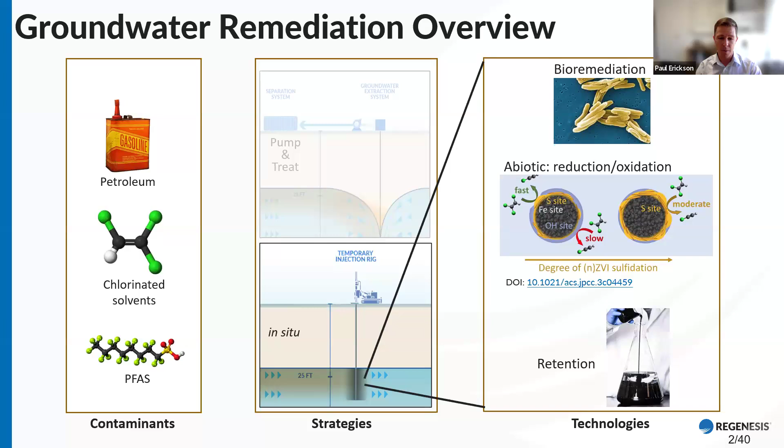But what we focus on at Regenesis are these in situ methods, where we're going to inject some amendment in the ground that's going to then passively help remediate or manage the contaminant that we're dealing with. So some of the different strategies and technologies that we offer at Regenesis and others can be something like bioremediation, where we are using bacteria to break down contaminants. Abiotic, so that could be chemical oxidation or reduction, as the picture I show here, where you can use zero-valent iron to treat chlorinated solvents.

But what I'll talk about today are these retention-based technologies. So using adsorbents, colloidal activated carbon, you can see a picture of it here, where we can inject these materials that are sorbents and use them, in the case that I'll talk about, to manage PFAS impacts in groundwater.

So again, I mentioned that I'd set up the stage on where a company like Regenesis fits in the world of remediation. And so this is what you've got, the different groups that are at play here. So site owners are those that have contaminated land or an issue that they're dealing with. Usually they're talking to a consultant directly. This isn't a perfect map. Obviously, there's crossover on a lot of these fronts, but it gives you an idea of how Regenesis, a tech development company, sits in the world.

And so everyone's got different questions that they're trying to address and problems that they're trying to solve here. As a site owner, what do I have to do? What's required of me, whether that's by regulation, what have you. But they're working with a consultant that's helping them figure out, based on what you have to do, what's feasible, what's going to be cost effective.

They're kind of helping put together the different technologies that they come to companies like Regenesis, which we've got our own set of issues and challenges that we're trying to overcome. Once we have a technology, how are we going to manufacture this? How are you going to get it to scale? We need to write tech standard operating procedures when you have these technologies and be the experts on getting them into the ground. And that's really where the partnership with academics comes in.

And so I show this picture for a couple of reasons. One, to highlight when you've developed something, especially an in situ technology, it's kind of understood that it's got flexibility. I can pick this up and hopefully bring it anywhere. And that's what I'm trying to highlight here. But on a personal note, you end up going to lots of different locations, and that's one of the things about the job that I really like.

This picture here on the left is an installation locally of a passive flux technology that we've onboarded because, and I'll touch on this in the talk, it's a really valuable way to collect groundwater mass flux data. We were trialing this in a local office here in California, which is where I'm based out of now. This is a picture of an early beta project that I worked on in my home state, which is Florida, actually North Florida. And then this is a project site where we're working in someone's basically front yard in Switzerland, which we also do work in, and as Cara pointed out, where I did a lot of my graduate work.

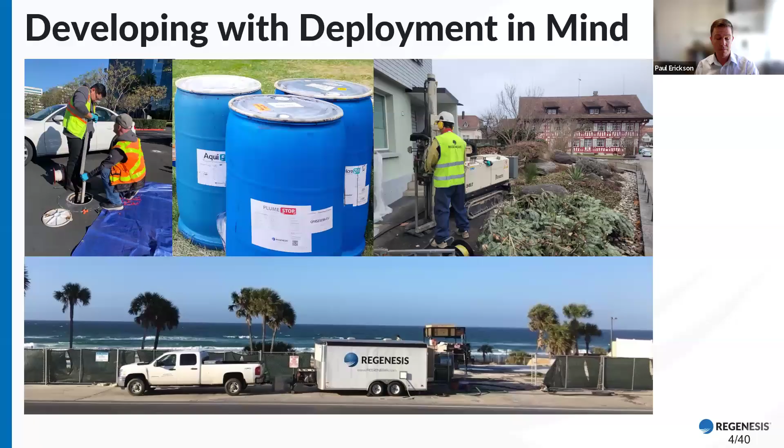So the idea is that these technologies can wind up anywhere. You've got to be able to pick them up and take them just about anywhere. And again, academics are how we answer those detailed questions to let someone like a tech development company figure out the specifics on how we're going to move this around and get it applied.

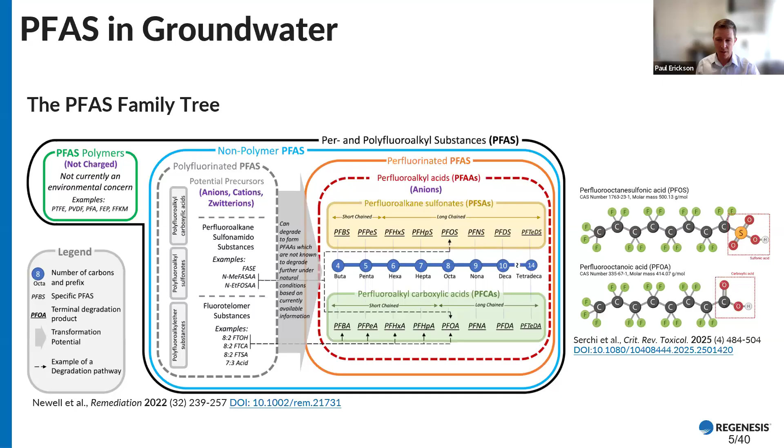Industrial point sources, so industry produced and used a lot of PFAS. And then there's the more relevant to our day-to-day lives, septic release. PFAS are present in all sorts of consumer products, resulting as well in wastewater treatment effluent releases to surface water. Another big one that many of you are likely familiar with that I won't talk about today is land application of biosolids from wastewater treatment plants, which have certainly contributed to groundwater impacts, but less so the case study that I'll focus on.

You've got all these different releases of PFAS, whether to the air or soil, but eventually they make it to the groundwater, and you wind up with these long plumes with no real degradation in the environment, at least for perfluorinated PFAS compounds. So we can't lean on technologies that a company like Regenesis already uses, like bioremediation. No proven application of bioremediation for PFAS. Very little good data right now on in situ means of destruction for PFAS. So we're left with few options to reach these low targets for these extensive groundwater plumes.

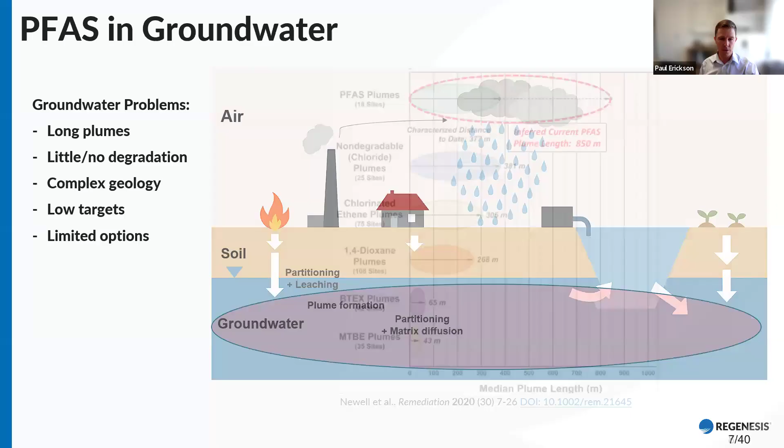To give you a picture of how PFAS stacks up with contaminants we've dealt with in the past: because you get basically no degradation in the environment for perfluorinated PFAS, your plumes can be very long. Starting down here with gas station related hydrocarbon contaminants, BTEX and MTBE, there are plentiful microbes in the environment that can degrade them even under anaerobic conditions, when there's no oxygen. That tends to keep the size of these plumes in check.

Then as you go up to something like chloride, which is essentially a tracer, there's also no degradation, so they start to look like these PFAS plumes. They get very long, very difficult to manage, and you have very few options. So we unfortunately find ourselves in a situation where you potentially have to prioritize risk reduction over removal. There are now tens of thousands of sites in the U.S.

Alone that have PFAS impacts in the groundwater. So we're going to need different strategies, different ways of thinking to deal with these contaminants once they've been released.

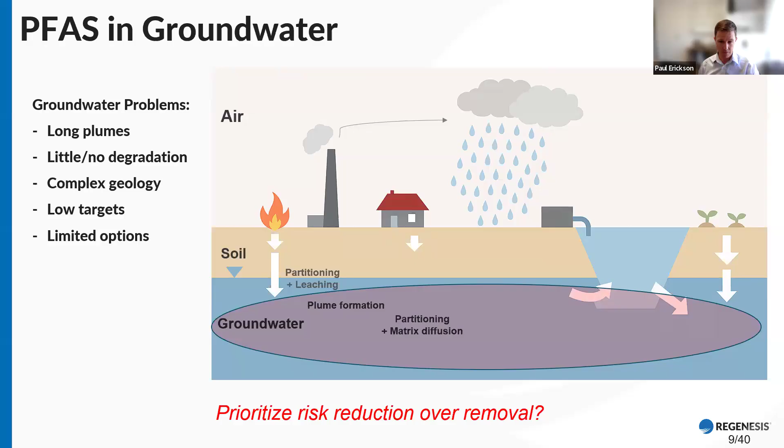So one idea, and really it forms the rationale behind the treatment that I'll talk about using colloidal carbon and injecting it into aquifers to increase the retention of PFAS within these areas, is based on this concept of monitored natural attenuation.

And so it's not a do-nothing strategy, but a focused risk reduction strategy. The idea is that if you've got PFAS impacts in your groundwater that are migrating somewhere, you're trying to prioritize and take note of where they're going and what they might be affecting, and then do something to try to alleviate when this mass shows up as a function of time.

So we can add sorbents, or just understand what the impacts will be to receptors. I'll show some slides here in a second to get into what that means.

If you can take what would be without any retention—whether that's natural retention, matrix diffusion, or these sorbents that we put in—and add something to the situation, you can lower the discharge with time. Then you're able to bring down what shows up in terms of mass as a function of time into a more manageable, acceptable area.

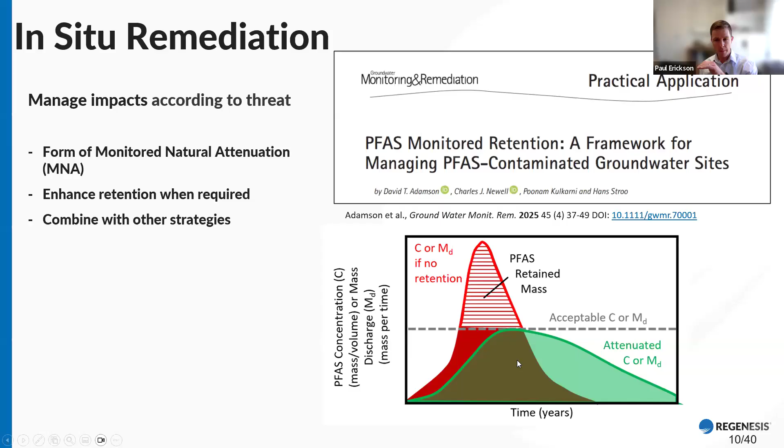The idea that Adamson here, and the folks at GSI, have painted is this landscape that kind of looks like a baseball diamond. If you've got PFAS plumes that are migrating, there's some mass discharge with time, and on the y-axis you've got how close you are to a sensitive receptor.

So drinking water wells or water bodies. What you're trying to do is understand where—higher being much higher discharge, and a shorter travel time being a problem because you're going to have an effect sooner.

You can prioritize where these areas are. And if there's low total mass and a long distance until you'd impact the sensitive receptor, you may be okay to just monitor the contaminants and mitigate the impacts that way.

And then when there's a situation where you've got more discharge or a closer receptor, you can put sorbents in, you can do something. Sorbents is just one of the measures that they talk about, and the one that I'll talk about.

But there are things you can do to try to push your site into this category where you can manage it in situ, and save the higher intensity, more expensive treatment strategies for the situations that really require them.

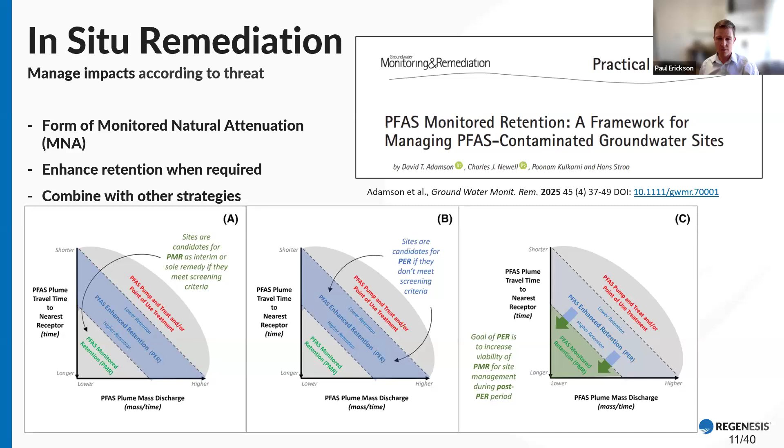Because with pump and treat, you will have situations where you still absolutely need to take the mass out of the situation or contain it by more intensive means. So that's sort of the concept, the landscape behind using strategies like this.

And so now I'll get into the case study here, a study that was done by Paul Hatzinger and his colleagues at Aptim, along with Tony Danko with NAVFAC. And I present this case study.

This is a technology that we've now used on a number of sites worldwide. But this is a good case study that walks through the different steps to understand the technology, how you get it into the ground, and the effectiveness of it within a limited time period.

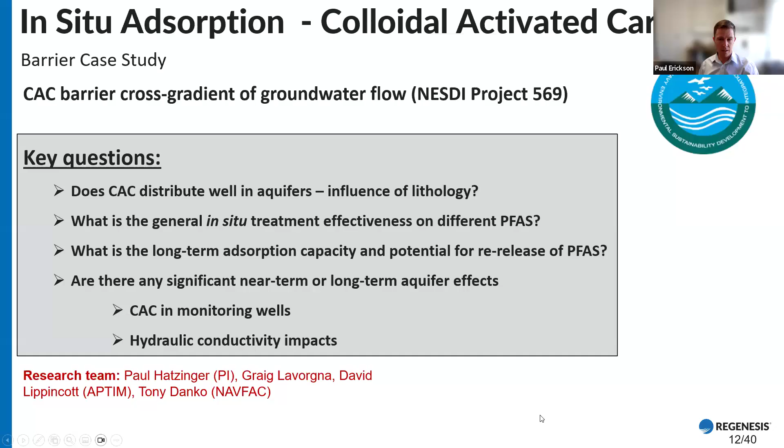And then looking at some of the other impacts to an aquifer that you need to consider when you're injecting a solid—which colloidal carbon is still a solid. You've got to keep tabs on other factors, like hydraulic conductivity changes that may happen. And so these were the questions the study was trying to address.

And so this is what it looks like. You've got your PFAS plume, and groundwater is pulling it into this area that we're going to treat with this colloidal activated carbon. Then, if everything is working right, you should get good distribution of your contaminants, and removal by adsorption and sequestration within this zone where we've performed our treatment.

And so the tasks of this study were, first, assess the site that the treatment's going to be done on. They did some column tests as an assessment in the field or in the laboratory of just the basics of the idea.

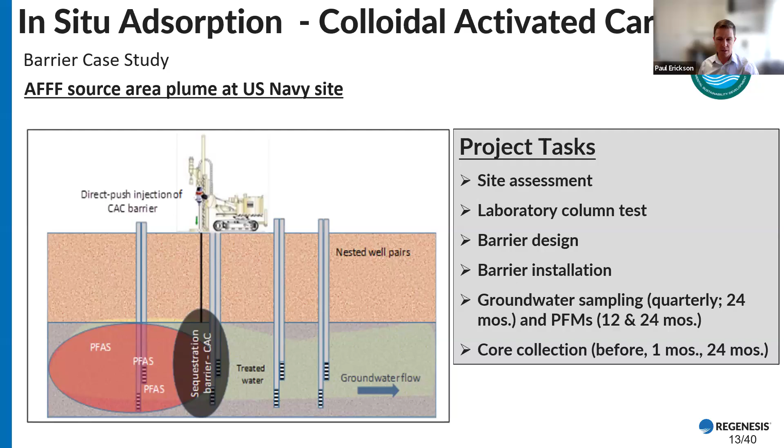And then really I'll get into the results from there. I'll show some pictures of the installation and then walk through the results of the study.

So this is what the site looked like. You can see here, a fairly sandy site. Depth to a confining layer, a clay layer, was about 25 feet.

I'll show some data from this A to A prime. The demo area, you can see here in this yellow circle, is pretty close to soil boring 1. And this was a fire training area.

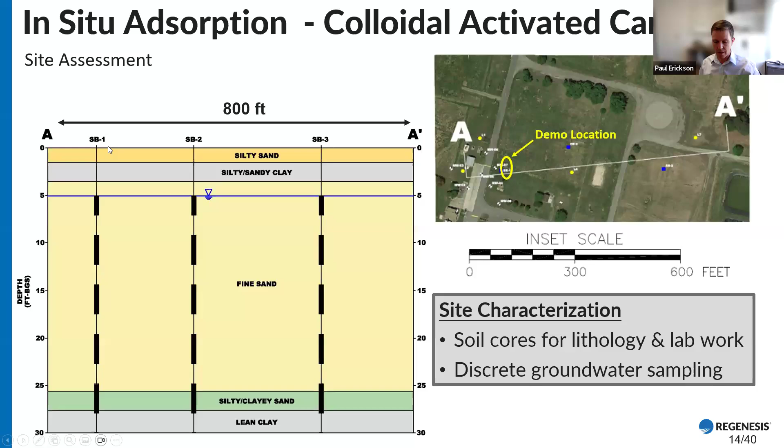And you'll see in these data, close over to where the demo area was, there was still quite a lot of PFAS in the upper borings, the groundwater in the upper areas. You can see it's dominated by these C8 PFAS, so PFOA and PFOS were really the most prevalent PFAS. You can see they're especially closer up towards the demo area and the source.

There were still some of the precursors and other smaller chain PFAS, but as you get farther away, you can see that there's either by flushing or by diving the contamination really in towards the bottom. But up in the area that we're working, there's a lot of mass still present up in the vadose. That'll come into importance when I show some of the results getting towards the end.

Just a quick look at the column study. Again, this was kind of a go, no-go step in the process, and this was all work done in Paul Hatzinger's lab at Aptim. It was trying to ramp up the flow rate of the groundwater.

So using site groundwater and site soil, they applied some of our PlumeStop colloidal activated carbon to the column, and then tried to simulate, in a series of just 4 months, 2.5 years of the study length of groundwater flow.

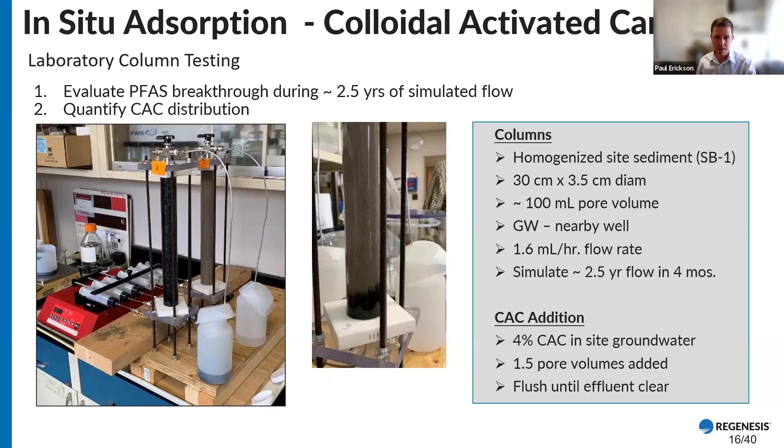So you can see here the evenness with which the carbon is coating. They're going to pull the cores apart and confirm that here in a minute, but you can see it flowing on, so it just flows into the sands. This is how you're able to build these hopefully continuous areas where you've put the sorbent that's able to remove the contaminant mass as your PFAS mass moves through.

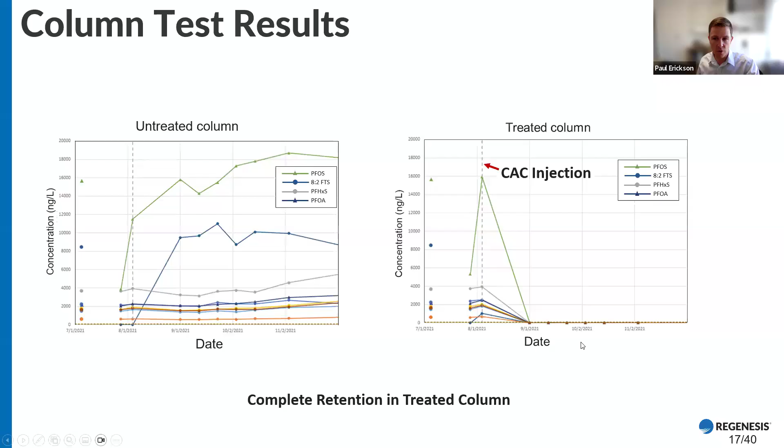I'm really just going to move through this pretty quickly, but as expected, in a short duration study like this, you see complete removal of the PFAS in the treated column, versus the untreated column where with very little lag, you see breakthrough. Again, that was because it was using site soil and site groundwater. But again, this is just a go, no-go look at the performance of this approach.

And then wanting to understand, okay, if we take this to the field, are we going to see distribution? Because we preferably like to have wide coverage of this sorbent so that you can remove the contaminants that are fluxing through and reach the sorbed mass that's already present within the treatment area as well.

So one way that they went about doing this is a combustion technique. They segmented the column, you can see here it was frozen and segmented, and then tried to get the carbon that was in the soil column this way. You can see fairly even distribution, and by this method, they were getting about 5 grams of carbon per kilogram soil, so a little bit higher than expected.

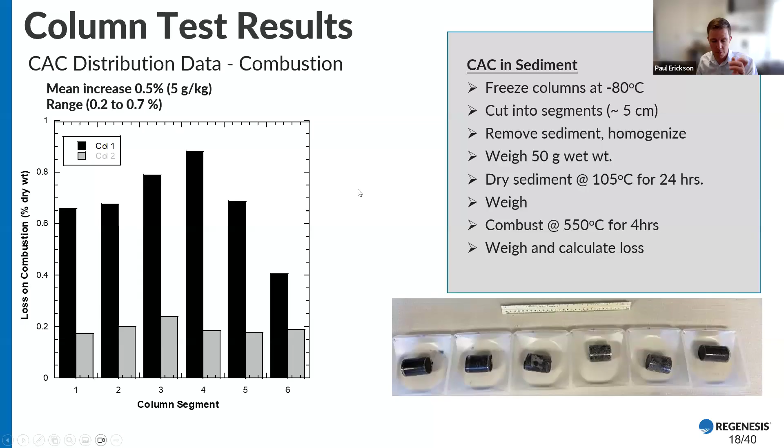And then they tried another method, developed in part by, or really entirely by, Ahn Pham and his group at University of Waterloo. It was a dye-based method they got the idea for, and we've spent some time back and forth with them on this, because it's something we can take to the field and use to help verify placement during an actual application. This is an example of an academic group helping us develop tools that are very practical and have very strong relevance once you get to the field.

This is the demonstration of this being done in Pham's lab, but they took those same soils and then ran the analysis again. You can see column 2 is the control, with no carbon put on. Column 1 was the treated column, and it got closer to what we expected and what you'll see the target dose was in the field, using this kind of method to figure out what the weight percentage is of our carbon on the soils.

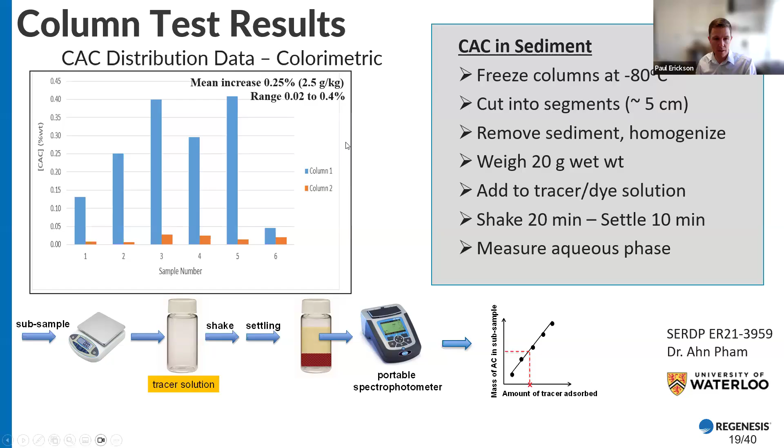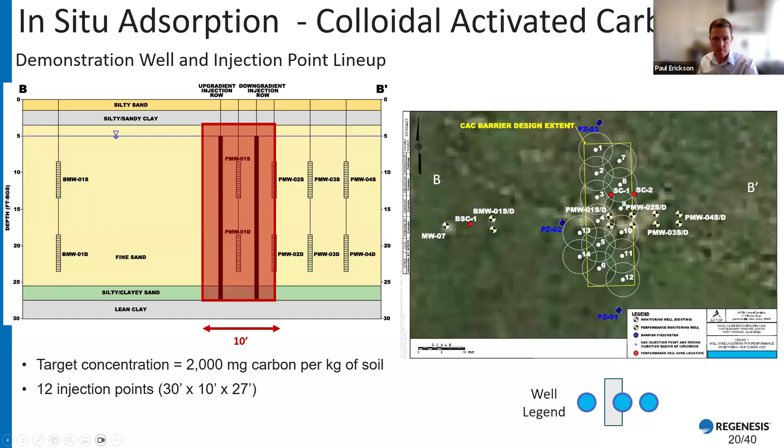And then this is the 10 feet down-gradient wells, again both shallow and deep for the data that we'll look at. Just to give you a picture of what it looks like to implement this in the field - on this particular site, the water from the hydrants on the site, this was in the Northeast, a naval air station, water had to be brought in and treated so that it didn't have PFAS in it.

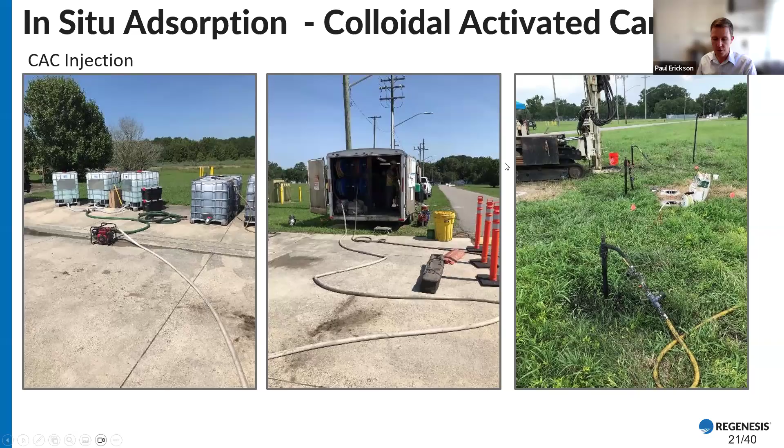That was the request for the study. You can see a picture of the trailer where the products are mixed and then injected into the field through these temporary push rods. So I've shown already a couple of pictures of these geoprobes - this is what we use instead of dedicated injection wells. You can put in these temporary points where you can inject the products after you mix them, and pull up the rods when you're ready to do different intervals. So there's a lot of flexibility on how you get the amendments in the ground and where you can work with tools like this if the geology will let you do it.

So getting into the performance monitoring - the field parameters that were measured, you can see here. But what I'll really focus on is the PFAS results, and then I'll show you some of the soil cores. Using those methods that were validated in the column study, they were able to go back out and, as part of this project, look and understand the distribution of the carbon within the soil, within the treatment area.

And then what I'll end with on the data is a measure of passive flux meters. This is a tool that, when you're talking about managing mass discharge and how much contaminants are leaving a site, it's important to think about mass flux - how much of the contaminant, not necessarily in concentration, but what's the actual mass coming off of a contaminated area, and are you managing that properly. These passive methods are really important for measuring that, as well as, I'll touch on it, the impacts to the permeability of our area - are we inhibiting groundwater flow with methods like this?

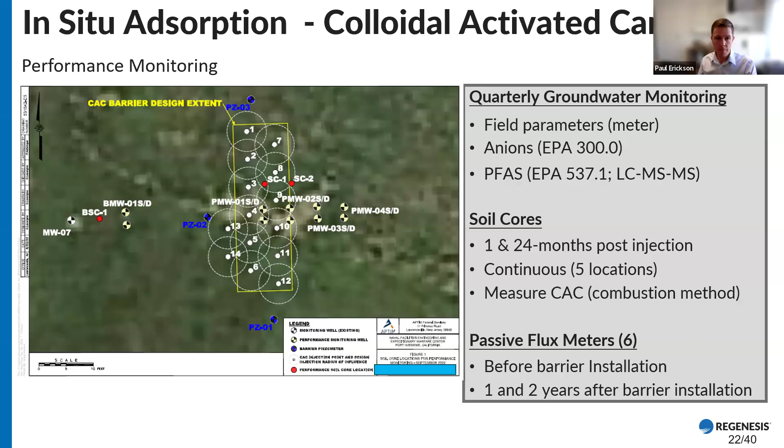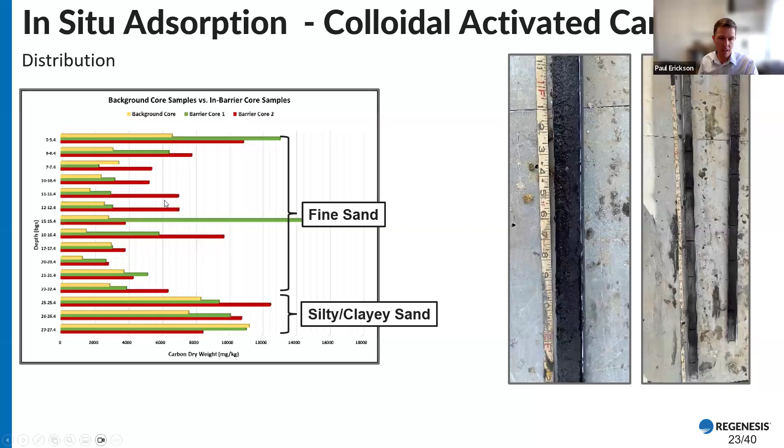If you look at the background cores, this was done by the combustion method, so they weren't ready to use the dye method on this particular project. What you see is that there is a background organic carbon that's picked up on, or just volatilization of what's in the soils with this method in background. In these sandier soils, the background's not so high, there's not so much organic carbon, but in the silty clay soils, you did have quite a high background. So we can subtract that out to get a measure of what the carbon concentration in the cores was compared to the background after application.

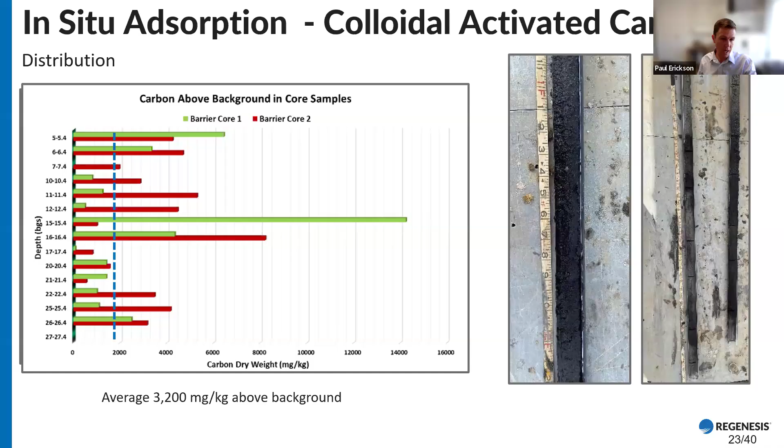What you can see is kind of what you expect. When we do these injections and put the carbon in the ground, what we're trying to achieve is a nice, even, uniform coating, but you do see heterogeneity in where the carbon goes. That's expected. Your aquifers are quite heterogeneous, and your material is going to follow the path of least resistance when you inject it. So generally what you see is distribution of these amendments, carbon or any amendment, within the areas that are more transmissive. But importantly, the dose we got, the average dose within these cores, remember we were targeting roughly 2,000 milligrams per kilogram. Within these cores, we're in that ballpark, on average. So we got the material where we needed it to be.

Now going into the data, this was 2 years of monitoring available for this project. What I'll do is step from up gradient to down gradient to give you an idea of what the performance has been like in this treatment.

What you see is that 20 feet up gradient, this red line, you've got the shallow concentration. This is total PFAS. And the blue one here is the deep. What you see is that you've got quite a lot of variability in the PFAS concentration. They vary by more than a factor of 2.

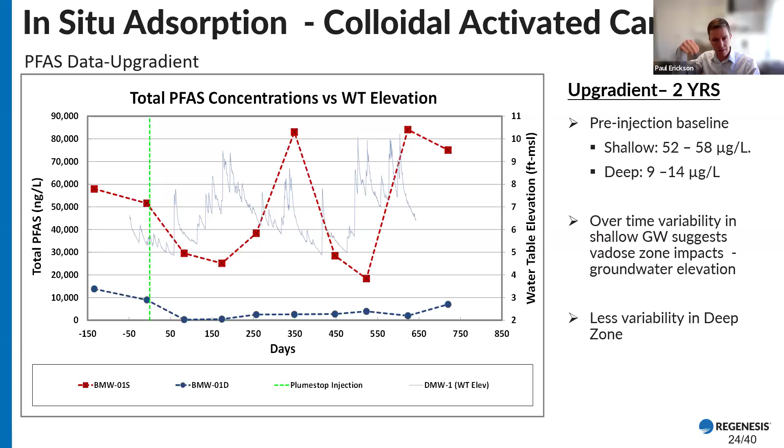Working up close to the source area, like we said, you've got ongoing infiltration potentially. And not to mention, you've got this air-water interface where you've got quite a lot of PFAS that tend to accumulate. If you have water table fluctuations, you can get mobilization of this mass down into the groundwater, and that's what you see here. So you've got the water table elevation, and what everyone kind of hypothesizes is that after you get these rainfall events where the water table comes up, you see these big fluctuations in your PFAS concentrations. That's much more attenuated in the deep, as you would expect. It's not as hydraulically connected with what you're seeing above.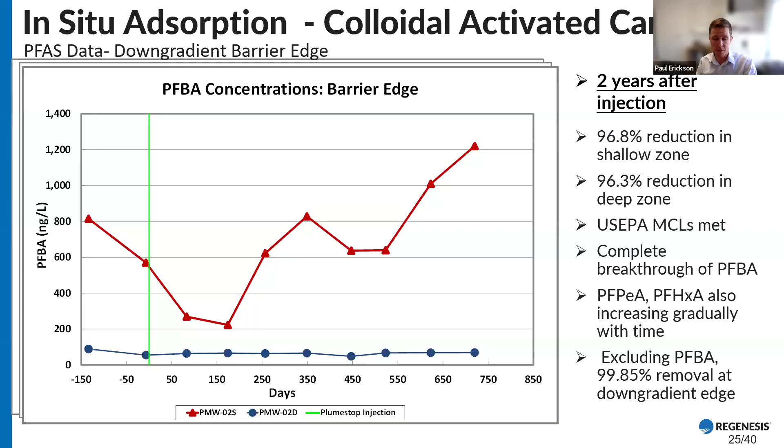But what you do see is breakthrough of your shorter chain species. This is one of the limitations of the technology. For the contaminants of most concern and highest regulation right now, you get good removal and good performance. But for lighter chain species, this approach is in the same situation as many others, that these compounds, PFBA and short chains, they're too hydrophilic. They don't adsorb well to activated carbon, and so we don't see performance with these species. They almost act, for something like PFBA, like a conservative tracer.

PFPeA showed a similar story performance-wise, but then we started seeing, most likely in the shallow area, infiltration from above or mass being picked up from fluctuation in the water table.

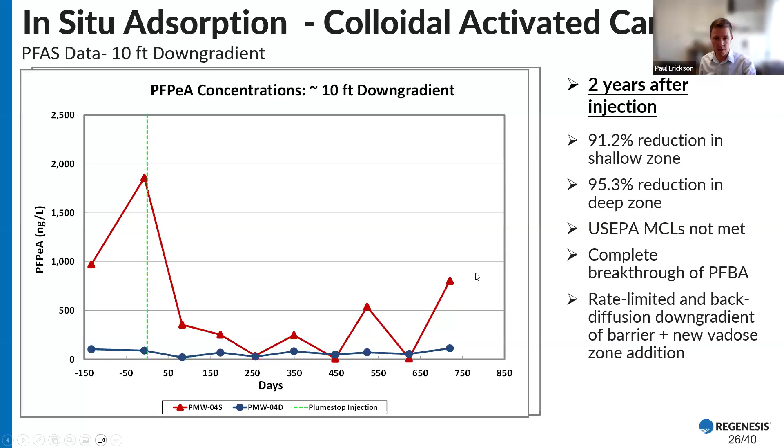Another measure beyond concentration, as I mentioned, is mass flux. They use these devices, and there are a few different offerings for this type of data collection, but the idea is that you put in resins that accumulate the mass moving through onto cartridges. We put them in each of our wells at a couple of different time points to figure out not just concentration, but the mass flux and also the groundwater velocity, and how that's varying before and after treatment.

Just as an example data plot, to give you an idea of the power of these data approaches: on the top here you've got Darcy velocity, and on the bottom, mass flux. This is just an example plot, but by depth you're able to delineate where your groundwater is moving.

In this plot, you see it's fairly homogeneous - you don't have much change in your groundwater flow. But on this particular site - again, not the one I'm presenting on, just a demo site - sometimes you get one particular zone that's very important for managing, for really knowing where your plume is evolving from and being transported from, and sometimes it can be this very narrow zone.

For these injectable methods, or any type of in situ work, understanding where your migration specifically is occurring is very important for doing it properly and getting the performance you're after.

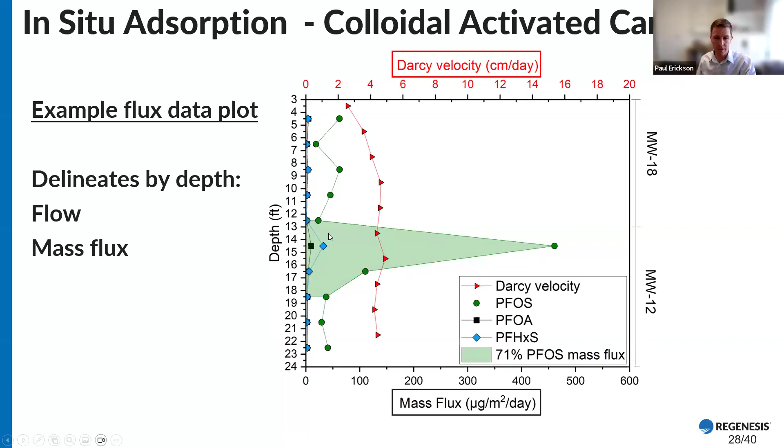Moving on to the data, you've got groundwater flow rates here, and you can see that from baseline to year 1 and 2 there was quite a bit of variability, and this is due to the water table fluctuating. As the groundwater table comes up, your groundwater velocity can go up or down as a function of that. Looking across the years and different wells, both the background within the barrier and down gradient, there was no evidence of aquifer clogging.

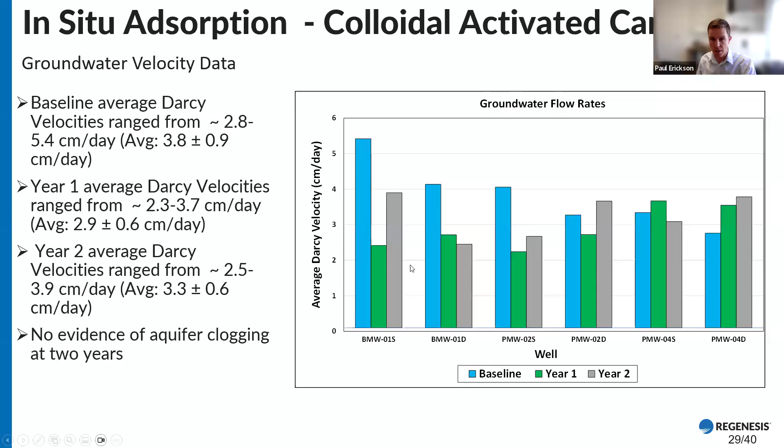So again, you do expect some modification to the permeability - you are putting in adsorbent - but the loadings that we target, we do with the intent to try not to change the permeability all that much.

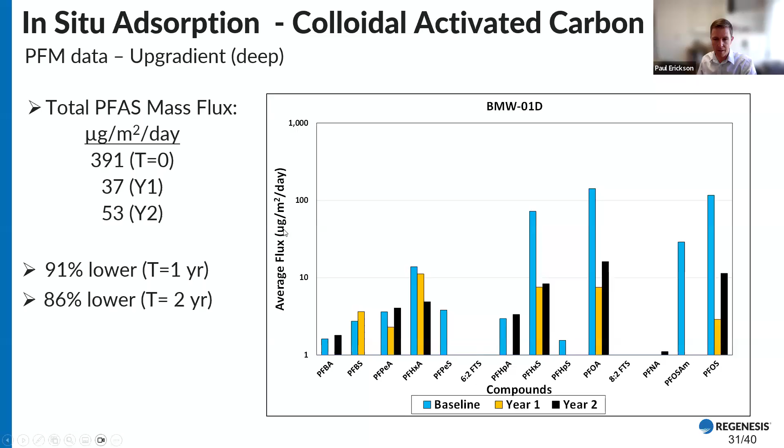Getting into the mass flux, up gradient of the barrier we again saw fluctuation from baseline to year 1 and 2. It's kind of all over the map, and again this is partly because of the fluctuating groundwater. That was the shallow, same thing in the deep. This is now a log plot on mass, so it's micrograms per meter squared per day - that's the up gradient data.

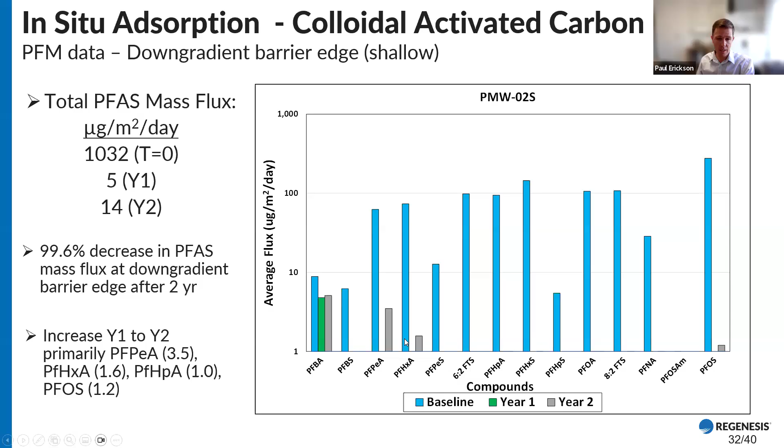Once we get into the barrier, similar to the concentrations, as you'd expect you see reductions - removal of your longer chain species is more or less complete. Again, for PFBA, here's that mass flux upticking after even a year, and then of course the second year as well. In the deep it's the same story: short chains are where you see a little bit of mass coming through, while the longer chains show good performance.

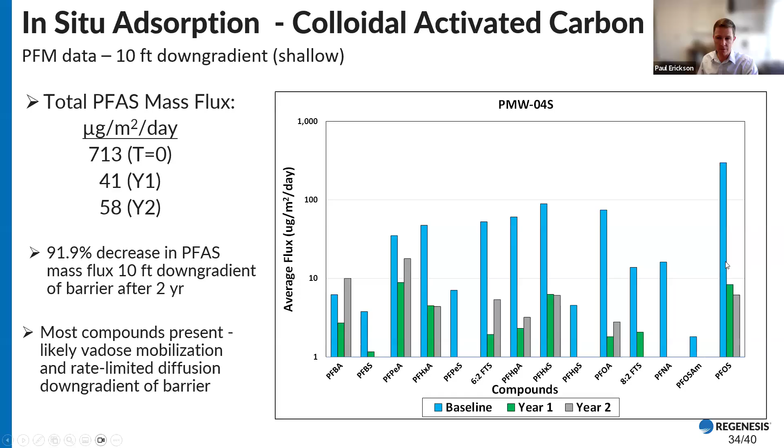At 10 feet down gradient, for at least PFOS, that same trend we saw - a decrease from year 1 and 2, especially over baseline - shows up in the mass flux data. Same story in the deep sections as well.

So wrapping up the case study, what we were seeing in the shallow was very likely due to the water table coming up and down - you get PFAS that end up getting mobilized, and you see that in the shallow data. That's something that has to be accounted for when designing and deploying these treatments: what's your performance metric, and what are your expectations for what you're able to achieve with methods like this.

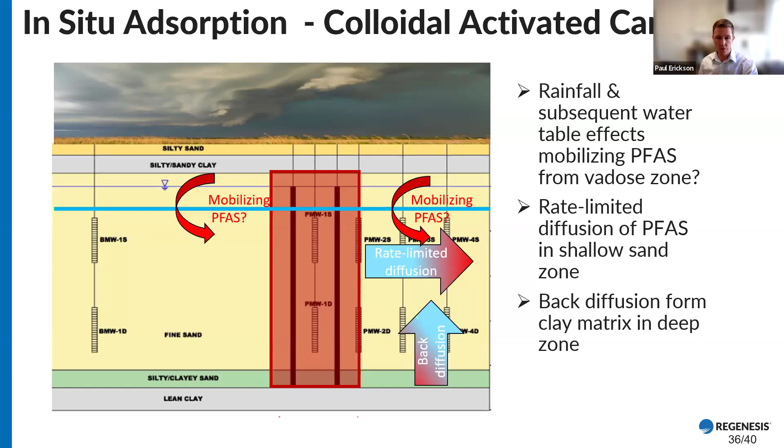In the deep, the mass that we likely saw in these down gradient wells, not so much in the barrier wells, was likely due to matrix back diffusion - contaminant mass that's been loaded up over the years in these silty areas coming back out, and you start to see that especially down gradient.

So as a project summary, overall the conclusions were that this type of approach, and others like it using colloidal carbon, is a means to achieve enhanced retention of PFAS.

You can manage mass flux as an interim measure, and depending on the situation, it can be an important strategy in how you're managing PFAS impacts in groundwater. And the field results demonstrated good performance over a short period of time. I'll get into the implications of that here as I close. But within this window of the study, the demonstration did what we wanted it to do.

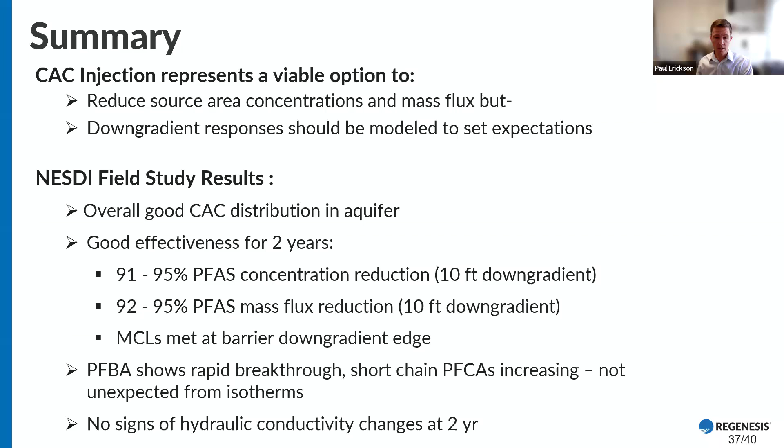And so we saw good distribution, saw good performance in the areas that we got the carbon, and importantly, didn't have hydraulic conductivity changes within this treated area. And so, that's great. You can do this for a couple of years, but then, what are the long-term implications for treatments like this? And that's another area where academia and working with researchers outside of what we have capabilities to do really comes into play.

And so this is work that's done, again, in the group of Anh Pham's lab, where they were looking at the impact on adsorption of the activated carbon that we use by co-occurring organics. So if you look at PFOS and PFOA and the impacts of just natural organic matter, so this is Suwannee River fulvic acid, your isotherms, which are kind of drawn out by the plots here, as you increase the NOM, the Suwannee River fulvic acid content, you do see a reduction in adsorption. So same thing with PFOS and PFOA.

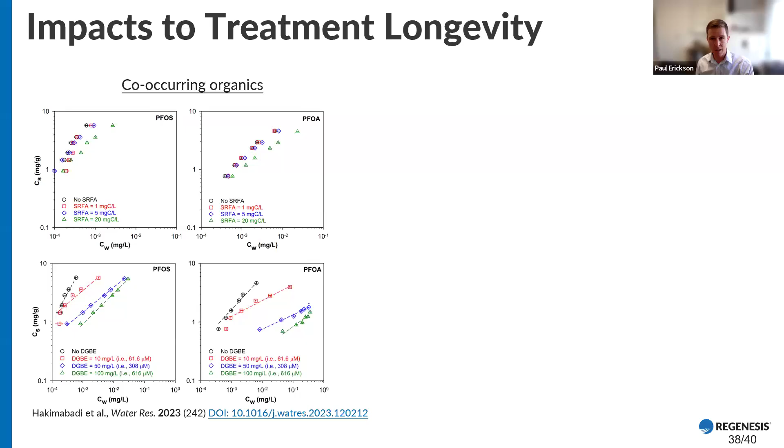And then here you can see the effect of this. This is diethylene glycol butyl ether. It's a common component of AFFF. So when this is present, when you've got organics that can compete for adsorption, you do see a reduction in the adsorption capacity of these in situ treatments of activated carbon. And so, this is something that's got to be accounted for and considered in the design phase if you're implementing these types of adsorption retention-based strategies.

Another important area that is of intense research and interest is what's the long-term effect of just putting things like this in the ground. And so this was a study that looked at what I call advanced aging processes. So wet-dry cycling, if these carbons are exposed to air, drying out and then rehydrating. Hydrogen peroxide, so this is quite a strong oxidant, or Fenton chemistry, which can, in addition to producing hydroxyl radical Fenton reactions, deposit iron out into the carbon pores.

And so, these are the kinds of things that have to be looked at, considered when we're trying to understand, okay, great, these approaches work for a couple of years, but what are the long-term prospects of them? How long are they going to last? Am I going to be coming back every couple of years to do this? Or is this a viable long-term strategy for managing these impacts in groundwater? There's more to it. There's also hysteresis that other researchers are looking into.

But you take these effects from co-contaminants and from aging and layer it on some of the modeling that's been done under more ideal conditions, and this is a publication that looked at that. Some 2D modeling on lifetime of these treatments demonstrated that, for single solute species here, again, this is 2D modeling without any of the implications of the co-contaminants and the aging that I talked about, but you do have significant lifetime possibilities depending on a variety of factors. And that's what this publication that recently came out tried to distill down: for these barrier type applications, what are the major drivers for longevity?

And you can see here this tool, very simplified. We put this diagram together to kind of offer the concepts, which I'd encourage you to check out if you're interested. This paper has a tool for modeling, a very rough back of the envelope, figuring out how long these barriers would work in the absence of the aging and other contaminants. But it's your groundwater flow rate, it's the PFAS concentration, the composition, and then how much of these sorbents you've put into an area.

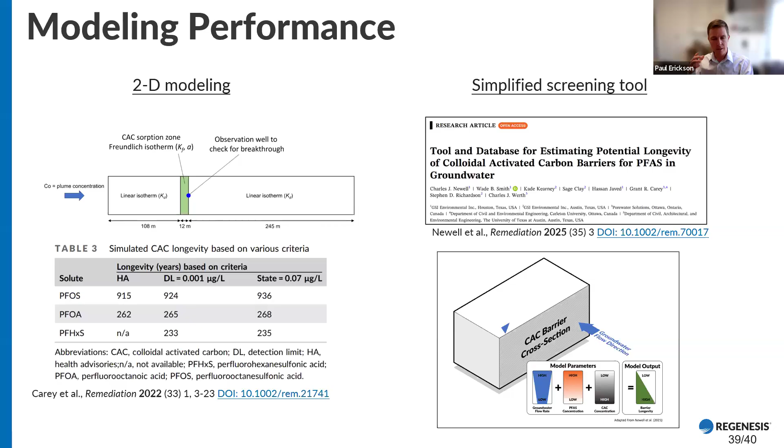Those are really what's going to drive the longevity, in addition to those co-contaminants and the aging processes that are at play. But this starts to give you an idea. If I take this modeling and I start to layer on these real world implications, geochemistry, aging, et cetera, what's the longevity going to be? When you put them together, we've got very long potential lifetimes, but then we know that we've got things that are going to attenuate that lifetime as well. And that's part of building the understanding of these technologies.

And so just wrapping things up before I take questions, I hope I demonstrated that given how widespread PFAS impacts are in the environment, in groundwater, we're going to need a toolbox of options. And using these sorbents, using these monitored natural attenuation and enhanced retention type approaches is a viable strategy. It's going to be a part of what gets done and saves those resource and energy intensive methods for when they're used most effectively, pump and treat and destruction methods.

And collaborations through academia really help us understand how to use these tools right, when to use them. And I hope I show that it also gives practical and technical insights on both sides. So the folks that we work with and collaborate with, they get the opportunity to see what the challenges we deal with in the field are, and we get to benefit from the advanced methods and tools that folks in academia have at their disposal.